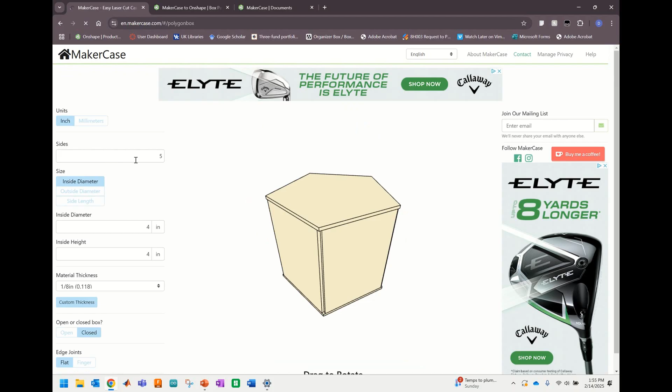What this website is, it's a website that auto develops boxes made out of wood pieces that can be assembled. For this example, we're going to do polygon boxes with 3 or more sides. Click on that. We now open the tool that lets us mess with the box and design it to be what we want.

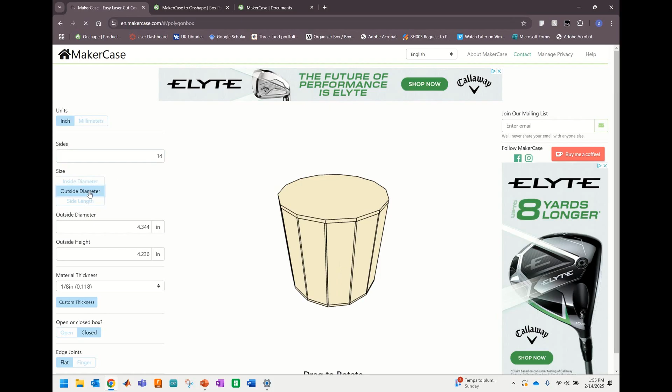So if we put in 10 sides rather than 5 sides, we'll see the box preview update. For this example, I'm going to do 14 sides of the box. I'm going to change my size to be the outside diameter, make the outside diameter 10.5 inches, and then make the outside height 2.25 inches.

Again, this is purely for example. There's nothing correct about this box or base that I'm building. It's purely for example in the video.

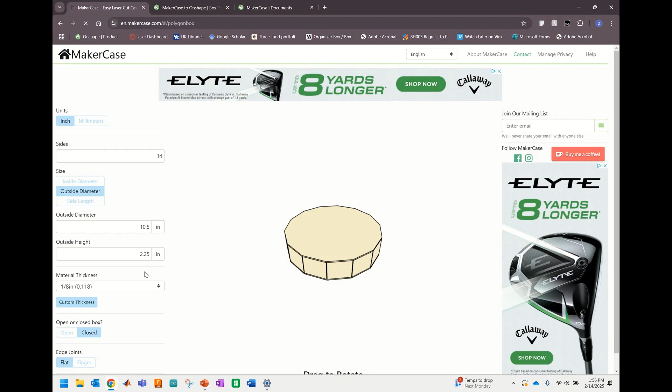We want to make sure our material thickness is 1/8 inch, not a quarter, not 3/8, not half inch. You want 1/8 because that's the width or thickness of the plywood that you're given and that you will use in the Innovation Center to do laser cutting.

We want to make sure it's closed, so we have a lid to work with, or a top to work with. If it's open, you can see that we just have an empty box with no top. So we want to make sure it's closed, so we have a top to work with. And then we want to put fingers on our joints so that we can assemble it easier.

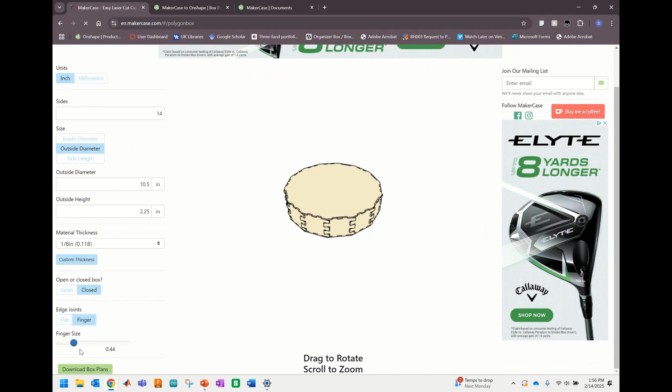We'll make our finger size just a little bit bigger, 0.4425. Again, this box is purely for example—there's nothing inherently correct or incorrect about it. You can mess with the dimensions to get them to be what you want. But once you have a box you're happy with, you can click on download box plans.

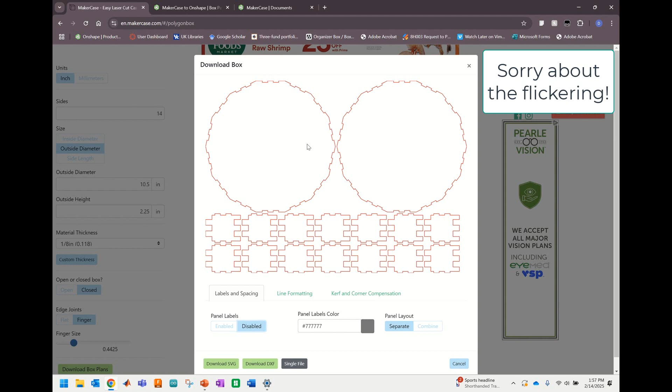I'm going to disable the panel labels, so where it says top, bottom, side 0, side 2, side 4—those are the panel labels—I'll disable those. And I'm going to download a DXF so I can import this into Onshape and manipulate the box, adding extra features I may need for my project.

If you don't need to edit the box or the base in any way, you could take this plan right here to the laser cutter and cut it out as is. But let's say you want to add a hole in the middle of this top piece, for a stepper or something to fit through. So we'll take it into Onshape and add that hole. We'll download the DXF.

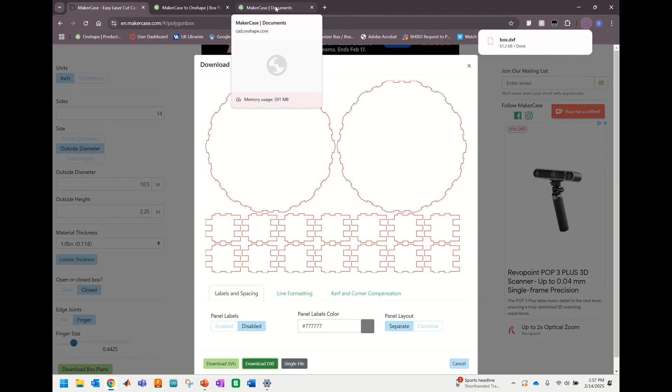It's now downloaded into my downloads as box.dxf. I'll go to Onshape, which I already have a tab open. This is just Onshape. I'm going to create a new document.

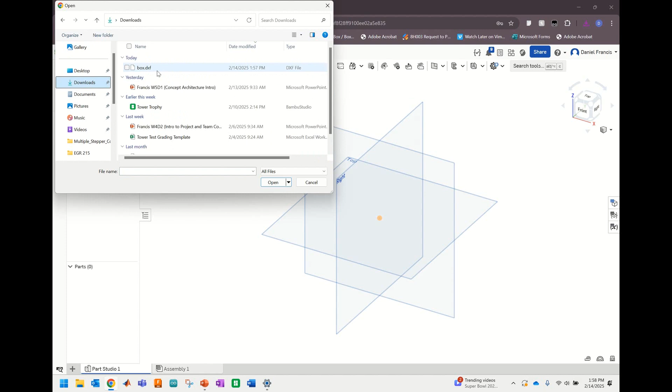Call it MakerCase video, just because that's what this video is. We'll come down here to this plus, where it says Insert New Tab. We'll click on Import, navigate to my downloads, which is most likely where your box plan is downloaded to. We'll click on box.dxf and hit Open. It'll import, and you should have a tab populate down on the bottom that says box.dxf.

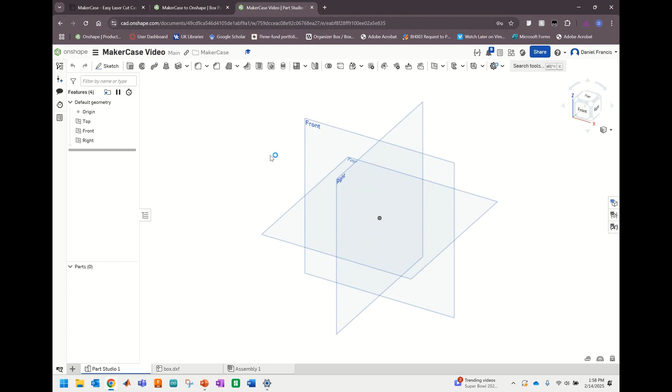So there's our plan from MakerCase. Now, to bring it into actual Onshape so we can start manipulating it, we'll go back to Part Studio 1. We'll do a sketch, choosing the front plane or top plane, whatever plane you want—I usually do the front plane.

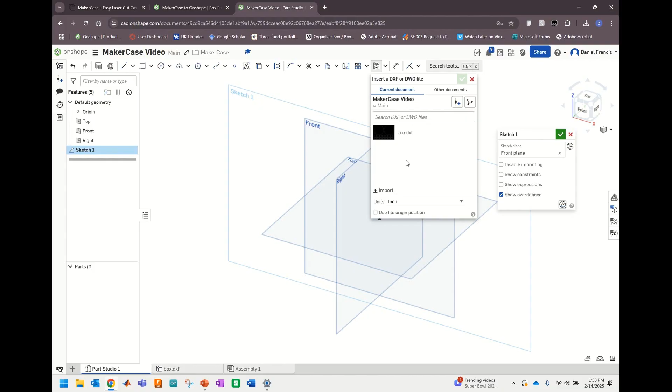Then we'll go up to the top where it says Insert DXF or DWG, make sure we're on the current document, and click on box.dxf. Hit that check, and now our plans for our box are brought in to a plane where we can edit them. So we'll hit the check on sketch 1.

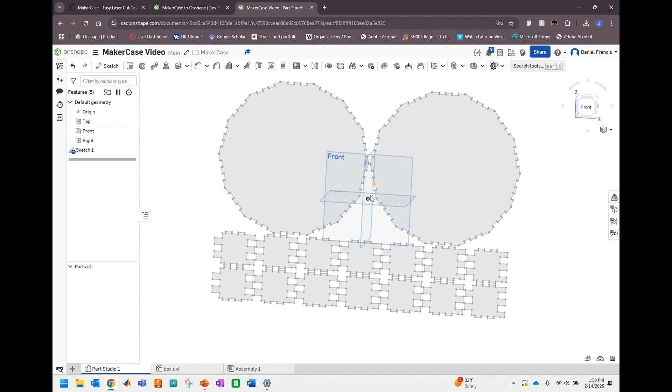Now we'll start extruding these to make them actually three-dimensional. I'm going to hide the front, top, and right planes just because they're in the way—I'll hit these eyeballs right here to hide them. Then I'm going to start extruding these plans to make them three-dimensional.

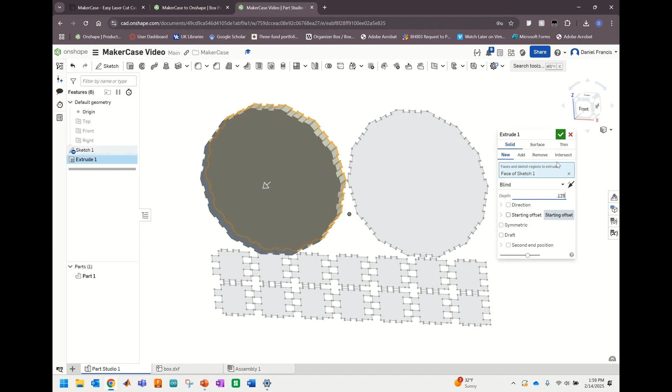So I'm going to hit Extrude and click on the first side, the first top. On the depth, I'm going to change that to 0.125, which is 1/8 of an inch, and hit check. You'll notice the rest of the sketch is now hidden because Onshape thinks we're done with it—just turn it back on by showing sketch 1, because we're going to continue extruding.

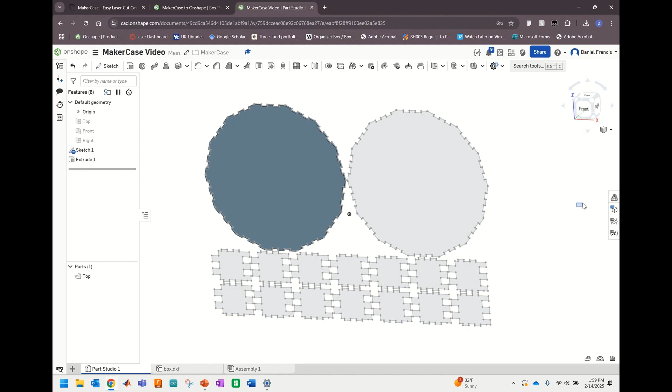I am going to come down here, click on part 1, right click and rename it, and just call it top. Then I'll come over here again and extrude the bottom—click on this, set depth to 0.125, making sure we're doing a solid and new so we're making a new part, and hit that check again. I'll rename this one to bottom.

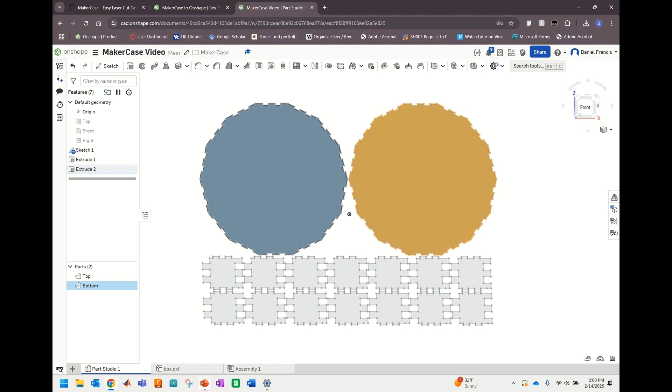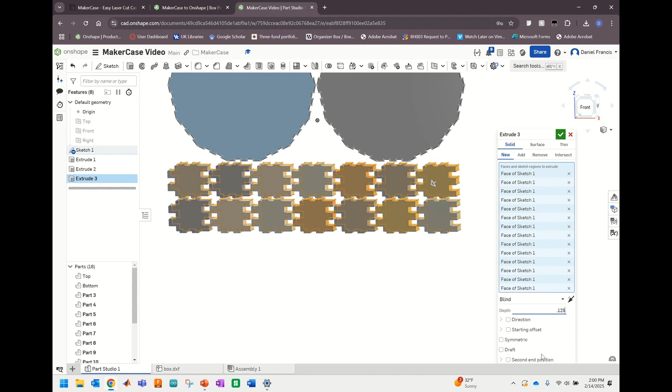Then I'll do it again—one more extrude for all of these sides down here. I'll click and drag, and now you see all these are being extruded. Again, we're making sure to do solid new so they're all unique, individual parts. We'll make the depth again 0.125 inches, since the plywood we have in the Innovation Center for your projects is 1/8 of an inch. Once we have all of that, we'll hit the check.

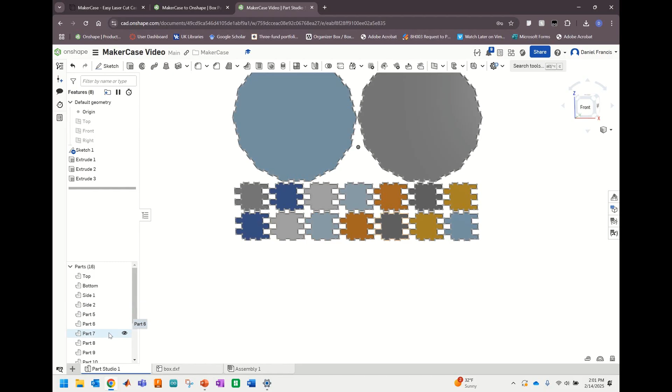Then I'm going to go through and just rename them all to side 1, side 2, side 3, and so on. Once you have them all renamed to whatever you want, I'm going to change the color of them to kind of simulate the wood color of the plywood. So I'm going to highlight them all.

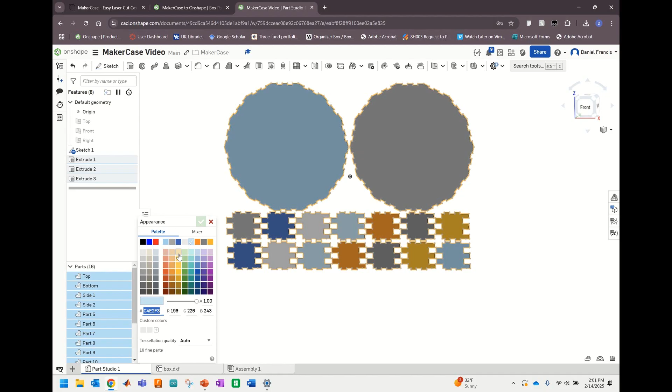Notice that over here in the parts list, they're also all highlighted. So I'm going to right click on any one of these and do edit appearance—it should say edit appearance for 16 parts. We'll just change it to this color, which to me looks like plywood. It can be whatever color you want.

It's just me changing it to be the color of the plywood, just to get a better view of what it will look like. Now, just to clean it up, I'm going to turn sketch 1 back off, and now we just have our nice extruded parts of our box.

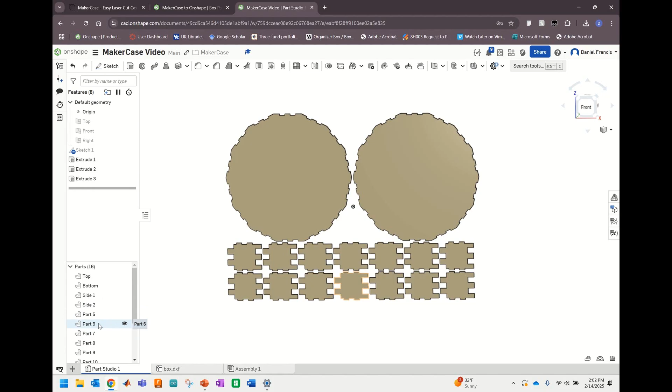Go through and change all these names of part 5, part 6, part 7 to side 3, 4, 5, and so on. I'm going to shift over to another Onshape document where I already have those named, where I already have side 1, 2, 3, 4, all the way down to side 14.

So once you have your parts brought in, let's say we want to add a hole right in the middle of the top piece, because you cannot add that hole in MakerCase. MakerCase only gives you these parts to laser cut. It does not let you edit it or add a hole or features on the parts.

So to add a hole, we'll do a sketch, click on the part we want to add a hole to, and add a circle. But you'll notice if you try to add a circle that there's nowhere to snap to - Onshape does not see the middle of the top of the board here. So we're going to add some features so we can find that middle.

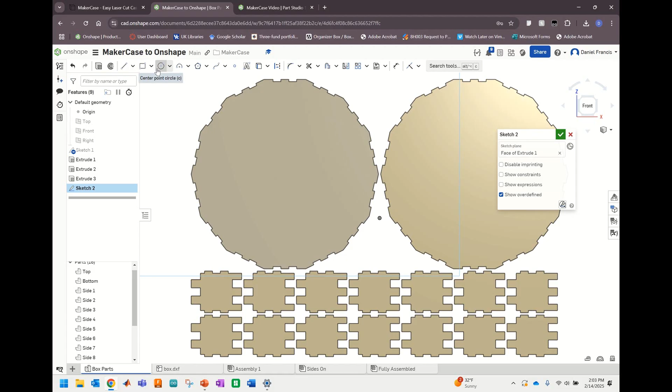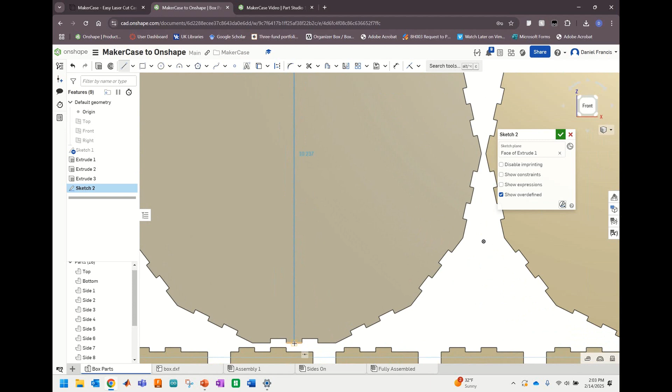I'm going to switch from circle to line and zoom in to the top of the board here. You'll notice it's trying to snap to the middle of this line - I can see this top piece is the top middle. So I'm going to snap to that, start my line, and go straight down to the bottom middle. You see how it snaps, that little square pops up - that indicates the midpoint of that bottom line, which is the middle of the top in this direction. So there's my line that divides the top into halves, left and right.

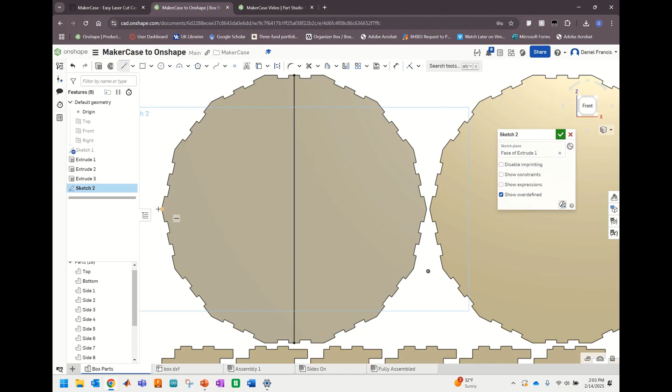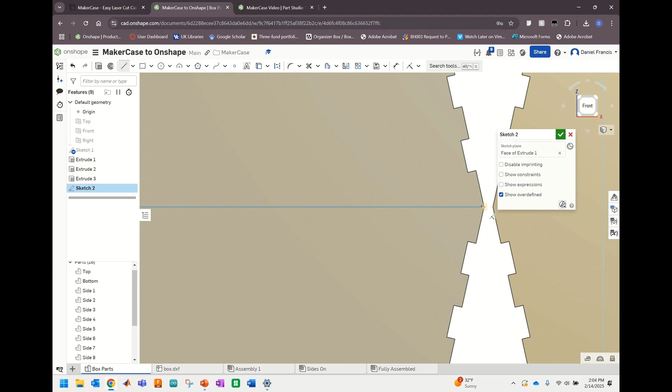Now we're going to divide it into halves, top and bottom, using our line again. Come up here, do our line. On the left side, go over to this edge, which we can see is the middle between top and bottom. We'll zoom in a bit to make sure it snaps to that vertex, not just anywhere, because Onshape is just finding features to snap to. So we zoom in and click on that vertex of the edge, then zoom back out, go over to the right side, zoom in again, make sure we snap to that vertex right where the lines meet, and then hit escape to end the line tool.

So now we have a nice vertical line which divides it into left and right, and a nice horizontal line that divides it top and bottom. So now this point, right where those two lines intersect, is the midpoint of the top of the board. So now we can go up here and do the center point circle.

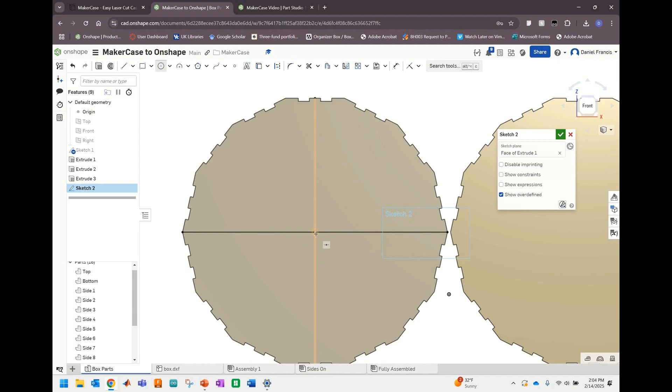Now we have a snap point to actually start drawing our circle. So we'll click at that snap point, drag the circle out, and make it a 1.5 inch diameter, just for example. We'll end the sketch, and then extrude that circle out.

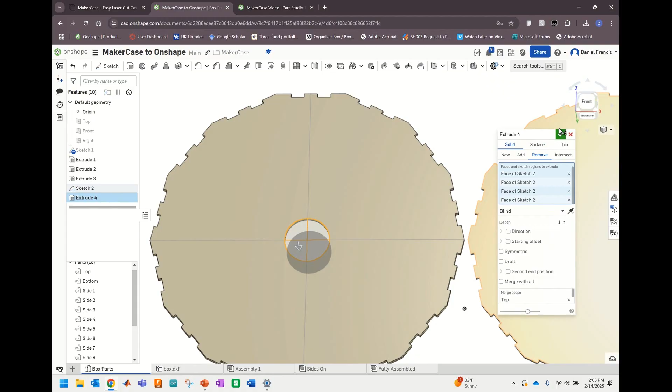You've got to click all 4 quadrants of it. Then we'll make it remove - right now it defaults to add, we want remove. We can just leave the 1 inch alone, because it's saying cut 1 inch through material, and the material is only 1/8 of an inch thick, so the 1 inch will cut all the way through. So we'll leave the 1 inch alone, make sure it says solid, remove 1 inch, and check. So now we have the plans from MakerCase, but also edited to include whatever features we want.

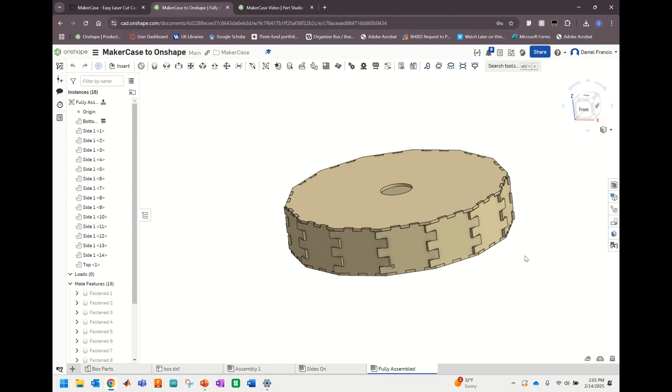Like in this case, this circle is what we wanted. An additional thing you can do after this is also assemble it in Onshape. So if you want to assemble it, because part of the project documentation is assembling your 3D models, I will show you how to assemble it like this, but I'm going to go back to the box parts in a second.

Let's say we want to laser cut this - let's say this is ready to laser cut. We'll go to insert new tab, do a drawing, and leave it as inches. There's inches and millimeters - we'll leave it as inches. So hit OK.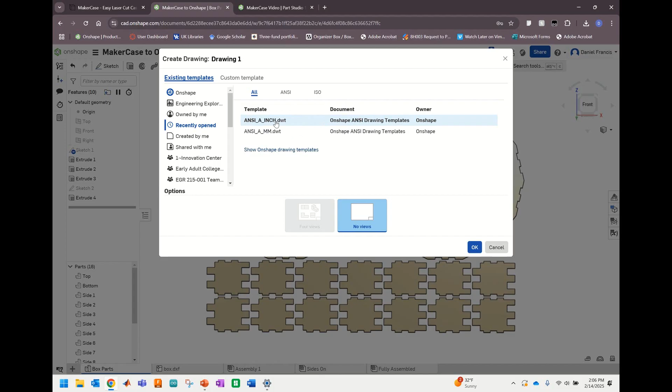We now have our nice drawing template. I'm going to close this for a second, close the insert view, and edit the size of the template. I'll hit this button here, right click on sheet 1, go to properties, and change this sizing down to custom.

I'm going to make the width 24 inches and the height 12 inches. I'm doing that because the boards you're generally going to be cutting on with the laser cutter are 24 inches by 12 inches, so I'm making the template the same size to mimic the boards we'll be cutting. Once you do that, hit the check.

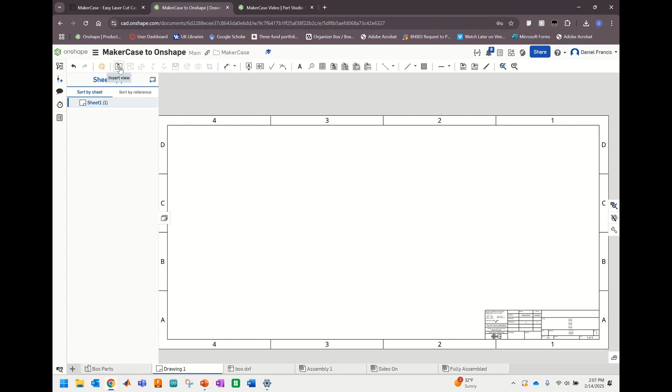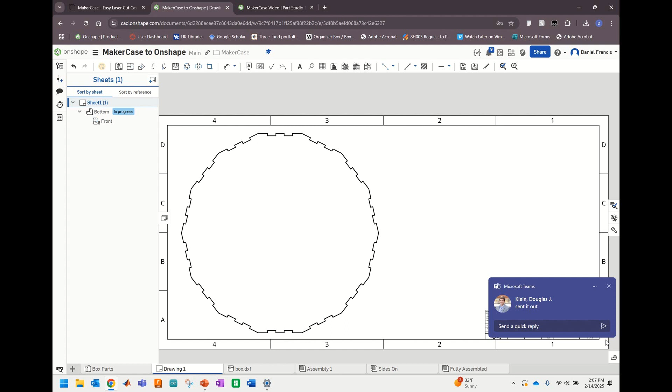Go back up to Insert View, click on Insert, and then we'll start bringing in our bottom. Make sure it's 1:1, not 1:4, so it's the actual true scale. We'll bring in the bottom, hit Escape, ignore that, and hit Insert.

Click Insert again, go down to where it says Top, and bring in the top piece. Again make sure it is the front view and 1:1, meaning it's the correct scale so it'll laser cut out the correct size you want. We'll put it there and hit Escape. Now we have our bottom and our top.

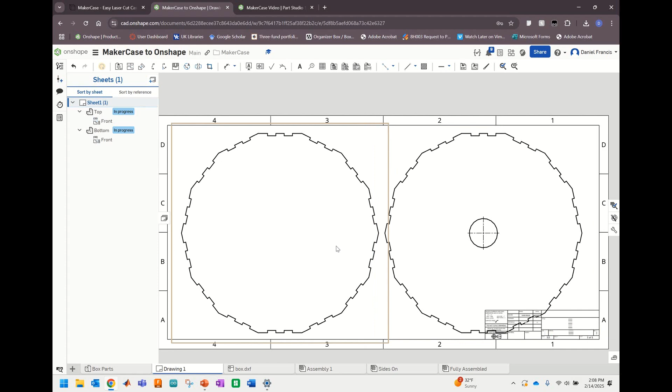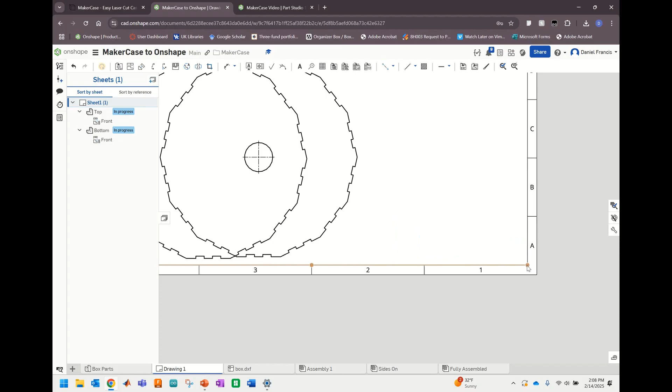To get rid of the naming box down here, you can come in and manually delete all of that. I'm going to move the top for a second, highlight that, and bring the top back over. That way, when we put it into the laser cutter, it only cuts out your top and bottom, not the naming box.

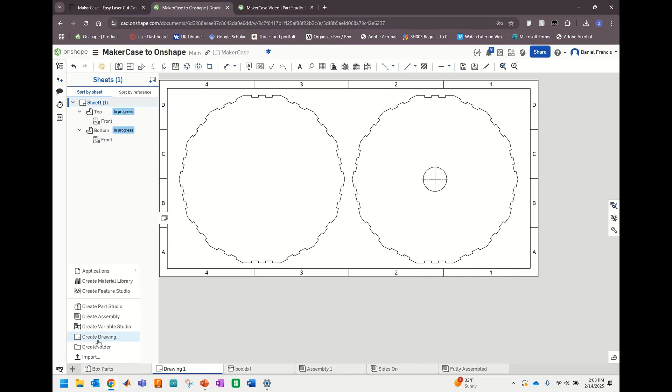We still need to add another drawing for the sides because there's no room on this for the sides to go. So we'll insert another drawing, do the same thing. I'll close out of this for a second, and we're going to resize the template.

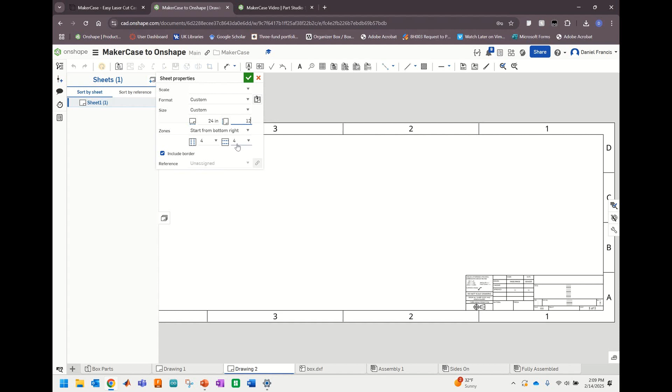Again, where it says size A, click on that, go down to custom, make it 24 inches wide by 12 inches tall. I'm going to delete the box in the right corner. If you're actually doing an engineering job providing drawings of a project, you want to have that box there because that's where you record your name, company, revisions, and so on. But for laser cutting, we don't need it.

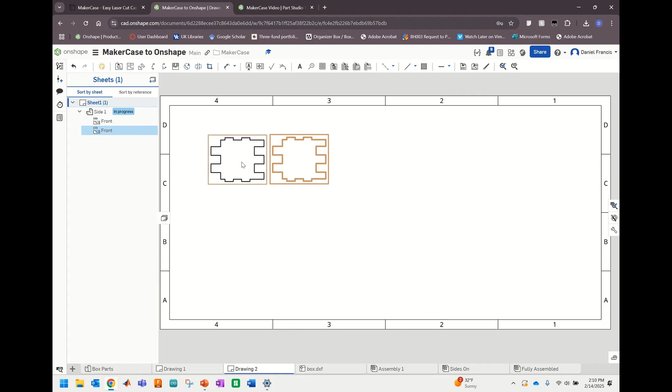So go back to Insert View, Insert, and then your sides. Since all the sides are the same, you can just copy and paste them 14 times because there are 14 sides. If you added a hole into one of the sides, you'd need to bring that side in with the hole, but since all 14 sides in this example are the same, you can just copy and paste until you have all 14 on the template.

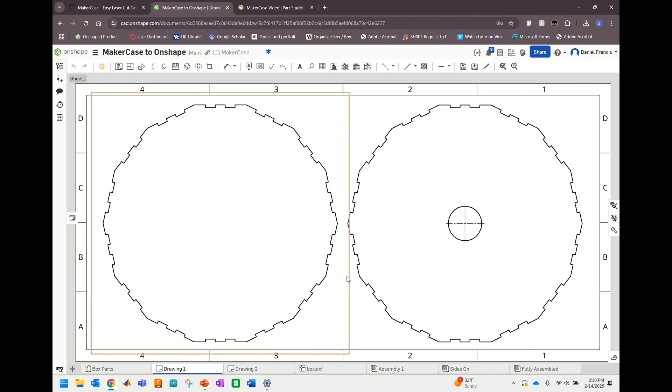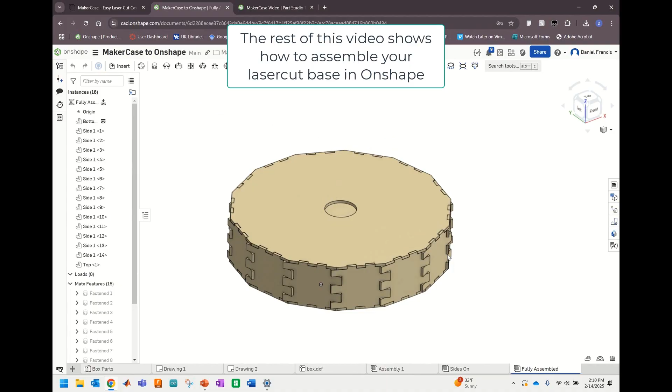Once you have these templates laid out with the 14 sides and the top and bottom, they're ready to be laser cut. To get these into PDF form, right click on the drawing you want to laser cut, export to a PDF, and that's ready to be taken into Adobe Illustrator and sent to the laser cutter. Now let's say we want to assemble it like this for the project documentation.

To do that, I'm going to go to Assembly 1, which is my bare assembly. There's nothing in it right now. I'm going to go to Insert and insert the bottom first. Put it wherever you want. For now, I'm going to hit the check mark.

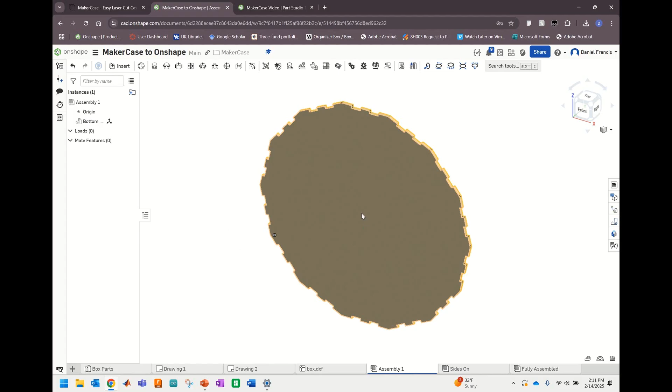I'm going to do some work with the bottom very quickly. I'll click on it, just click on the bottom, and you see these axes pop up. I'm going to click this back axis with the circle with two lines popping out of it, which allows me to rotate it. So I'm going to rotate it 90 degrees just so it's sitting flat.

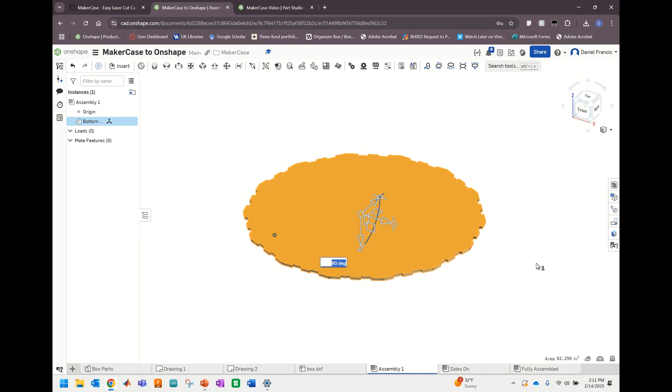Make sure it says 90 degrees. You can also just type in 90, and when you have it where you want it, click. Now that bottom is sitting at 90 degrees. I'm also going to right click on it and just fix it in place so the plate, or the bottom, can't move.

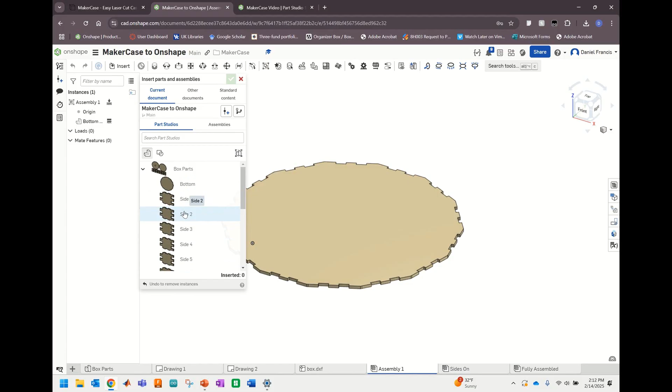Now I'll go back to insert and start bringing my sides in. Since all 14 sides are the same in this case, it does not matter which one I bring in, so I'm just going to bring in side 1 over and over. If you made a change to one side, like adding a hole in side 12, you'd want to make sure to bring that specific side in, but since all 14 are the same here, I'll bring in side 1 fourteen times.

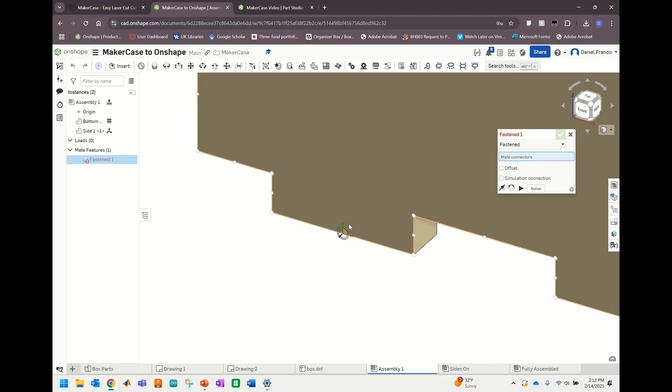I'm going to put it somewhere close to the board, hit the check mark, and mate it. I'll go up here where it says fasten mate, zoom in to the side, click on the left bottom edge, and make sure that mating circle is on the same plane. I'll click on it where it is. So that's our first mate.

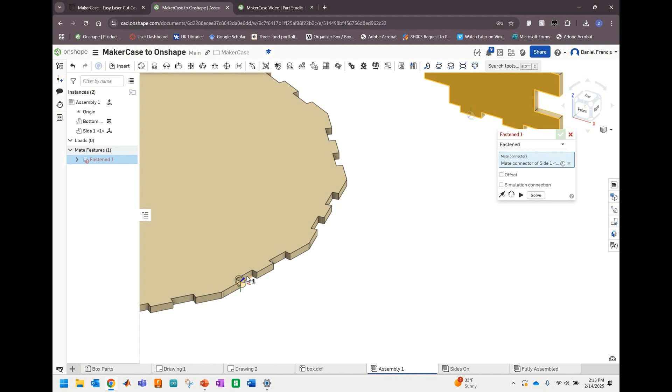I'm going to come back to the box, the plate, and look at this cutout section, because we have one tooth here which will go in this section, and this other tooth which will go in this section. I'll zoom in and click the bottom section of this mate area, making sure that circle with the green, red, and blue is planar to what we're looking at, not sitting off-plane but on the same plane as where we want to mate it. So click it.

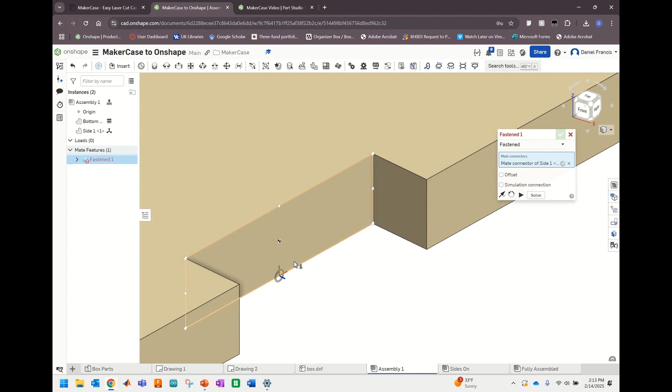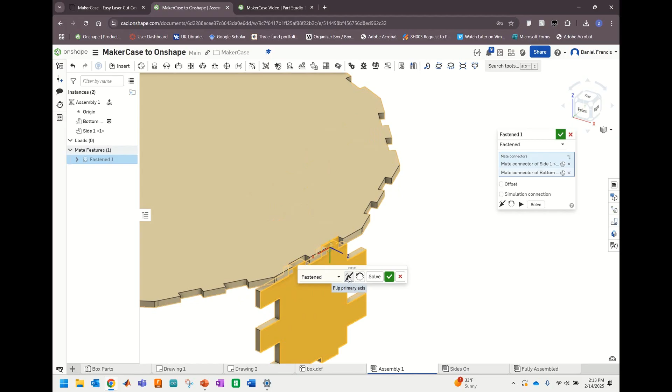We'll bring in our side. We'll see the side's not exactly where we want it, so we can come over here and do reorient, then flip it around, and now it's where we want it. Hit our check.

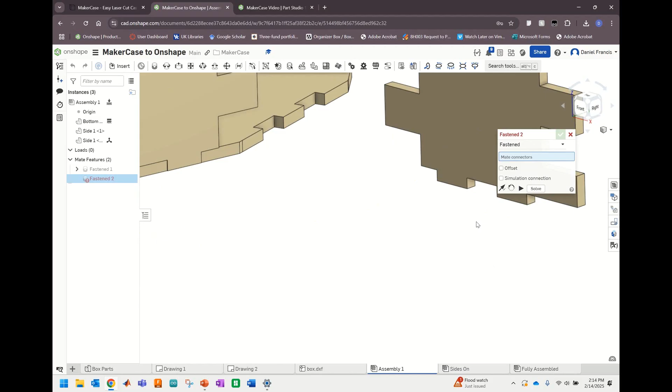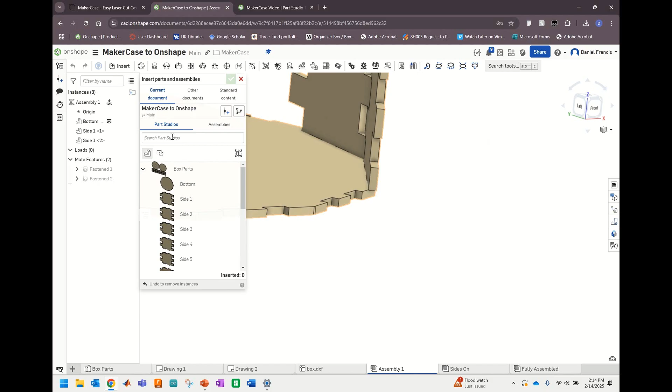Then we can do the same thing: bring in another side, do a fasten mate again, and repeat the process. We see that they're nicely snugged in there, and we'll just keep doing that all around the perimeter until we have all 14 sides of our box on.

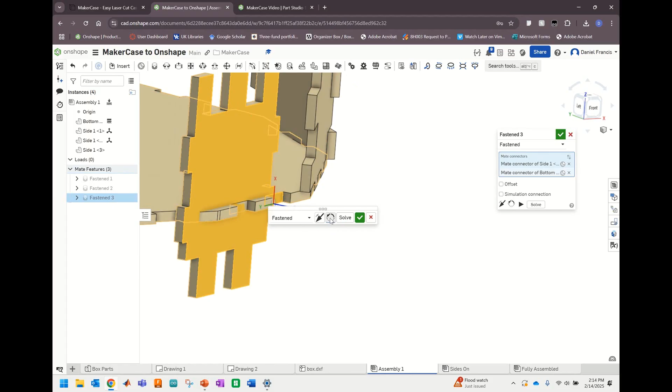So I'm going to do a fasten mate again, reorient, flip, and hit check. Sometimes you put a side on and it will go exactly where you want it, so you may not need to do the reorient and flips. But if you have issues where it doesn't line up as expected, then you can do the reorient and the flips.

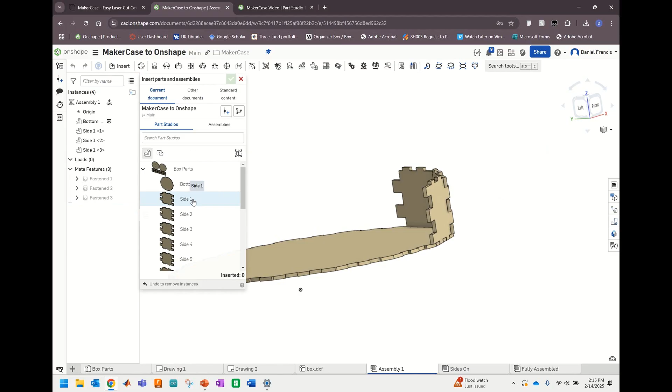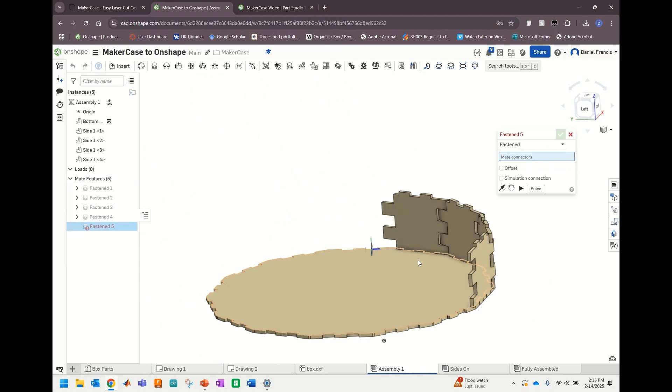I'm going to do one more, and then jump to the example I have that already has them all assembled. So we'll do a fasten mate again, and you just do that all the way around. Now we'll jump to the example where I already have all 14 sides assembled.

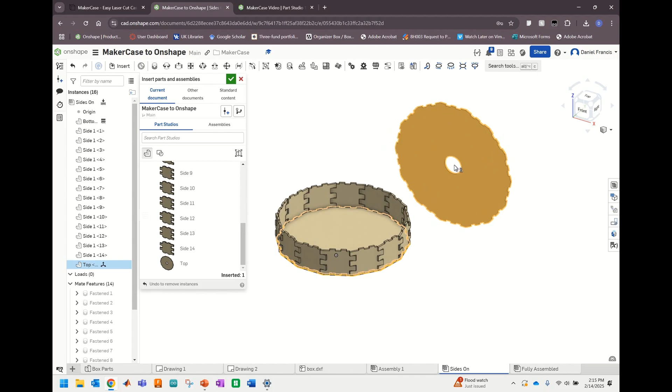Then we'll bring the top in. We'll go to insert, scroll down to the bottom where it says top, and put the top wherever you want it. Hit the check. We're going to do the same thing with the top that we did at the bottom: click on it, click this back rotational axis, and drag until it gets to 90. When you have it at 90, click off of it.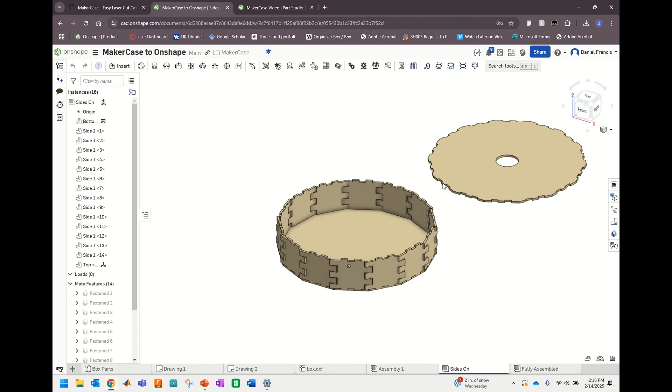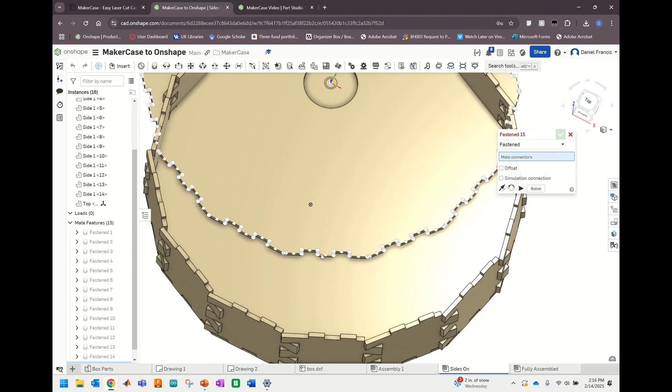I'm then going to manually drag it and line it up, and see that this tooth right here needs to line up with this slot. So I'm going to do a fasten mate, zoom in on this tooth. Looking at it, I can see that based on how the top is lined up, this tooth will line up with this slot.

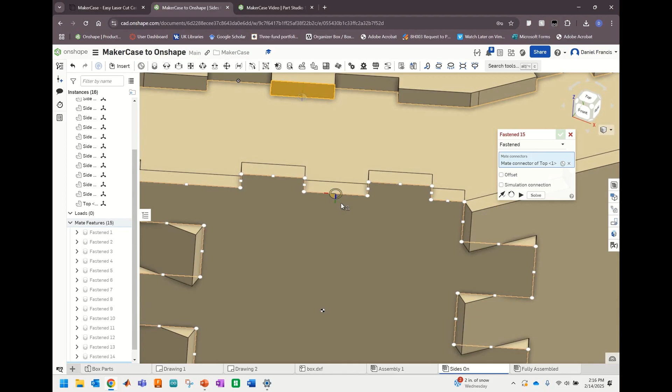So I'm going to zoom in onto the front of the tooth and make it so the alignment circle, the mate circle, is on the bottom middle of the tooth. Click on it, then come back to the edge of the side, clicking on the top middle of that slot, making sure the alignment circle is right where you want it. Click, the top will move over, hit check, and now you have a fully assembled base from MakerCase that is easy to laser cut and a lot faster to manufacture than waiting on a long 3D print.

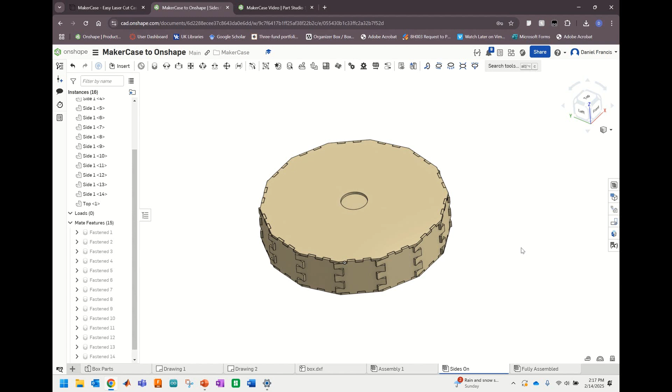In this example, all I did was add that circle in the top, but if you wanted to go back to the side, add features on the bottom, add features on the sides, or add more features at the top, you totally can. This is a very easy way to mirror and mimic the plans you have for a 3D print, but makes it much easier and quicker to make rather than waiting for a 3D print to finish.